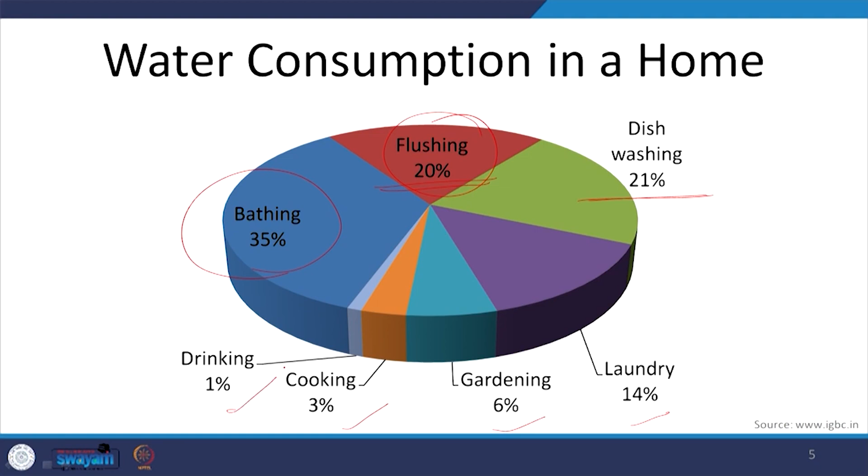WCs which we are using now, we are gradually shifting from the Indian style squat pans more and more to the European toilets. The flushing requirement in India in residential buildings, homes, is also increasing, it is changing. It is then followed by dishwashing, which is still quite low in Indian homes, and then all others like laundry, gardening, cooking and drinking. So this is the overall distribution of water consumption within a house.

Now, if we have to improve the efficiency of how water is used, we are talking about the 3 R's. First of all, we should reduce the amount of water consumption in the residence. Now, how do we do it? We will talk about it in subsequent slides, but the first measure is to reduce the amount of water consumed.

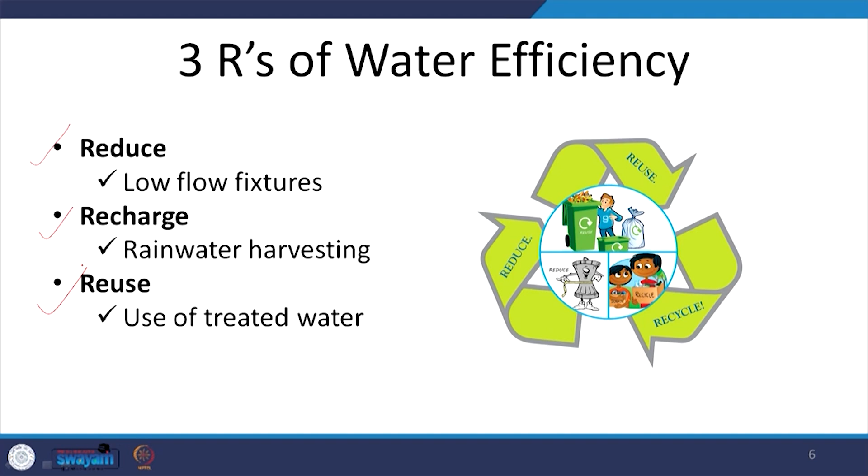The next is recharge. So we reduce and then we recharge, capturing the rainwater, as we have also seen in the previous week's discussions on storm water management. So we actually capture the storm water, the rainwater, in the form of rainwater harvesting. We first reduce and then recharge parallelly, and the third one is reuse. Reuse is after treating - so we first treat the wastewater and then reuse it for different purposes. How these 3 R's will be achieved when we are talking about sustainable buildings or sustainable built environment?

The approach is to first reduce the amount of water consumed with the help of low flow fixtures, or also through the use of enhanced irrigation systems, because gardening or landscape is a major consumer of water in any building or built environment.

Once we have reduced the amount of water consumed in a building, we treat the wastewater through on-site STP, sewage treatment plants. So whatever water has been wasted after usage, we capture it, treat it, and reuse it.

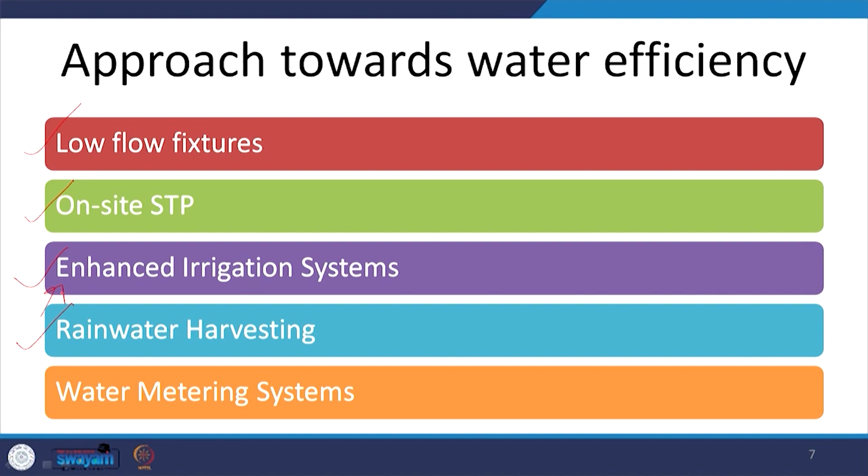In addition to STP, we also capture rainwater through rainwater harvesting to make up for the use in the building, so that we do not have to depend upon underground water systems, or reduce the load on municipal systems, because municipal water systems are actually drawing water largely from surface aquifers and underground water.

We have to reduce our dependency on all of these water resources and become water independent. So we can capture the rainwater and use it throughout the year - that should be the ideal scenario. If not, then at least getting close to it is what the intent should be.

In addition to these, there are water metering systems. It is established that anything that is measured and monitored is what we value, and vice versa, whatever we value we measure and monitor. Once we are able to measure and monitor what is happening, what is going where, we are able to improve upon the system.

If we know where water is getting lost or wasted, we will treat it. But if we do not even know where the water is getting wasted, where it is going, we cannot improve upon the efficiency of the system. So we need to have in place the water metering systems.

Let us go over each one of these in detail through the course of this week's discussions on water. First, we will talk about the goals of water efficiency. The first and foremost is to reduce the quantity of water consumed in a building. That in turn leads to reduction of municipal water supply and treatment burden.

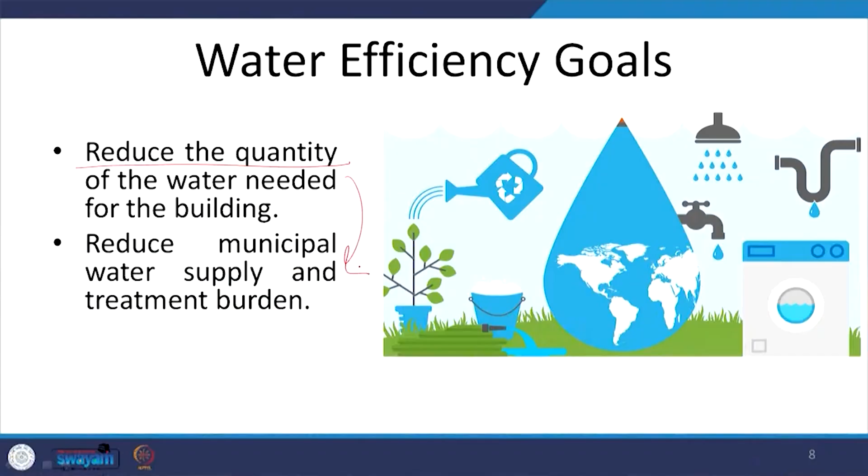So the first is to reduce the quantity of water needed. How do we do that? What are the strategies? Let us look at some of the strategies which are highly efficient, extremely efficient. One of these is dry composting toilets.

The basic concept of a dry composting toilet is to use the soil, use the excreta and let it dry, so that it totally disintegrates and composts to give us good manure, which can further be used in the fields for gardening, as manure. In this system, there is no water that actually goes into the sewer, so there is no wastewater generated, because no water is used for flushing.

Instead of flushing with water, what actually happens, as you can see in this image, is there is a seat, a WC, and instead of using water, there is sawdust mixed with lime. Both of these are sprinkled on after use. So instead of water, only dry matter is used.

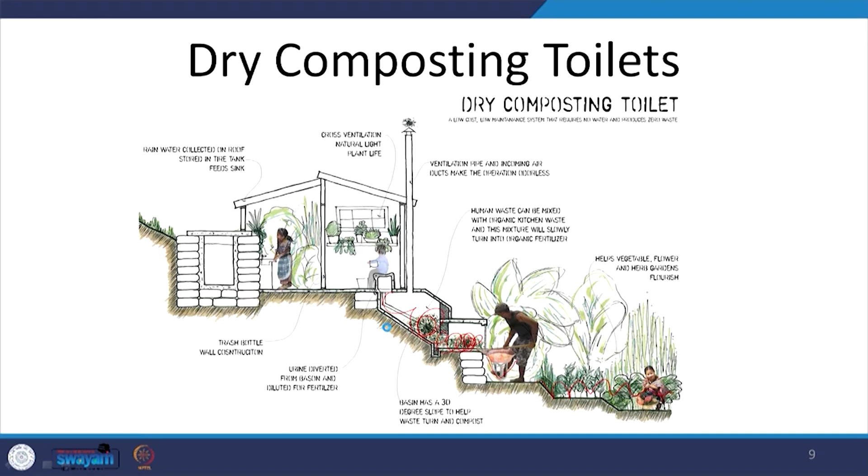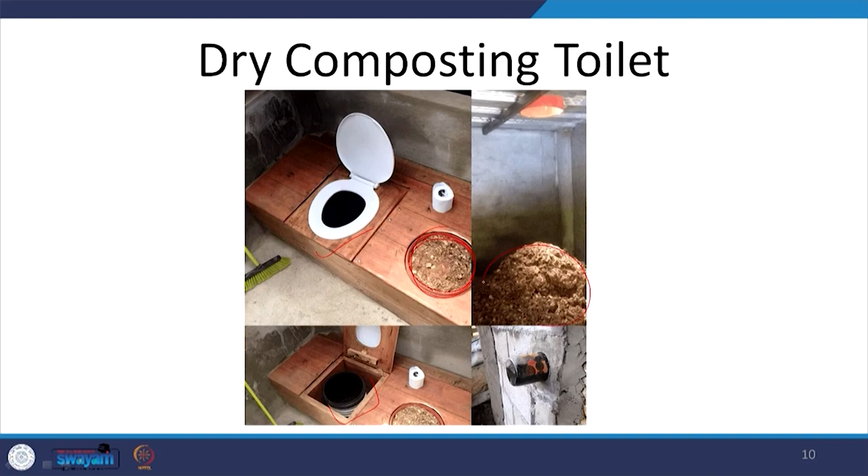This dry matter helps absorb any water content in the soil, which is collected in the tub, or in some cases in a chamber. The water is totally absorbed and the dry waste is left to dry and disintegrate on its own, leading to formation of a very rich compost, which can actually be used as manure in the gardens. This is the basic idea of a dry composting toilet.

Unfortunately, because of the psychological barrier, we are not able to use dry composting toilets very commonly, and it is not a very popular concept, but sooner or later we will have to come back to this concept of dry composting toilets. If we see how under the Swachh Bharat mission, the toilets have been promoted, which was an extremely good step.

Which was a good initiative by the government of India, where toilets were provided to each household which did not have one, so that open defecation can be controlled, and it has been controlled, almost brought down to 0%. But in turn, because now every household has a toilet and we are used to using water for flushing.

The water usage in all the villages everywhere has tremendously gone high. And where does this water come from? It is limited. This water is coming through pumping of underground water, and that is causing a severe drop in the underground water tables across the country, even in the rural areas.

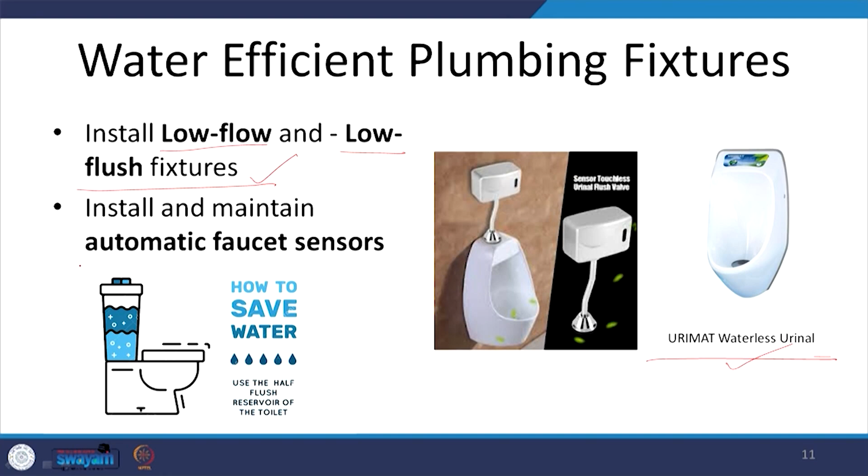So, the first step, ideal step, would be to use fixtures which are zero water consuming. If not, then we will install low flow and low flush fixtures. We will also encourage the use of automatic faucet sensors, where the flushing automatically happens when it is used, so you do not flush it unnecessarily, it is automated with the help of some sensors.

So, first of all we select an efficient plumbing fixture. In addition to that, we also install the low flow fixtures. So, with this low flow, we mean that for the same pressure we reduce the amount of water which is being consumed by installing the flow restrictors or the flow aerators.

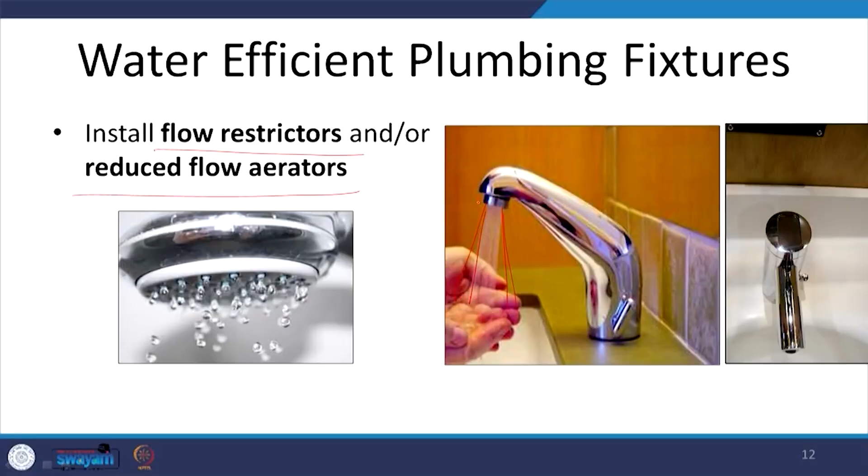So, in this flow, instead of just water, there is a lot of air which is mixed with the help of this aerator which is installed here, which is what we were seeing in the newspaper clipping, where the city of Pune was promoting the use of fixing aerators in the taps. So, with the help of this, the pressure is maintained, but the amount of water which is consumed is reduced. This is the low flow fixture.

So, in the market today, there are a variety of these low flow fixtures which are available. We also have provisions for adding aerators to the existing fixtures which are there, so that provision is also there, and market is reasonably ready, competently ready, and there are a variety of these products which are available.

Now, if we look at the green building rating systems, these rating systems emphasize upon reducing the consumption of water from the baseline. Now, we need to have a baseline from which the reduction in consumption can be calculated. So, this baseline criteria for India is given by the National Plumbing Code, and this is what is followed by the IGBC and other green building rating systems as well.

So, if we look at this table, the baseline criteria is in terms of the fixture type and the maximum flow rate or capacity for this fixture. For example, for water closet, for a full flush, it says 6 liters per flush is the conventional water consumption, and in a day per person 1 flush is assumed.

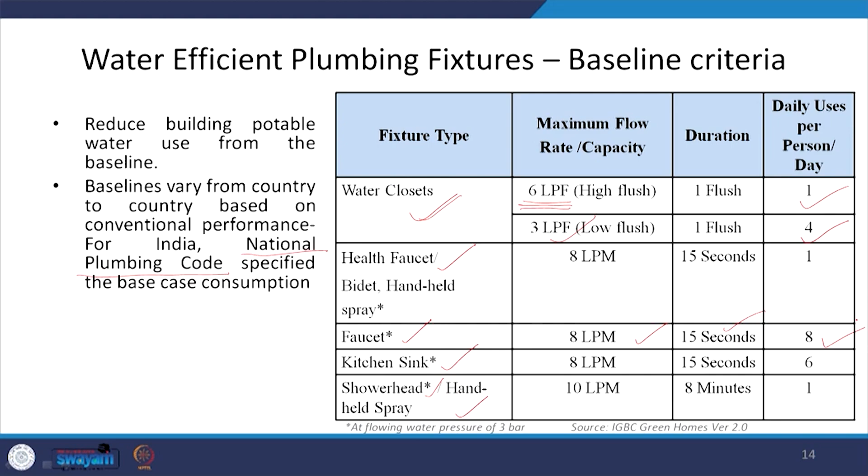With the help of this baseline, the conventional water consumption, baseline water consumption, for any building can be calculated. This is as per LEED—I am taking the example of LEED here. Different rating systems have different baselines, which they have largely taken from existing codes.

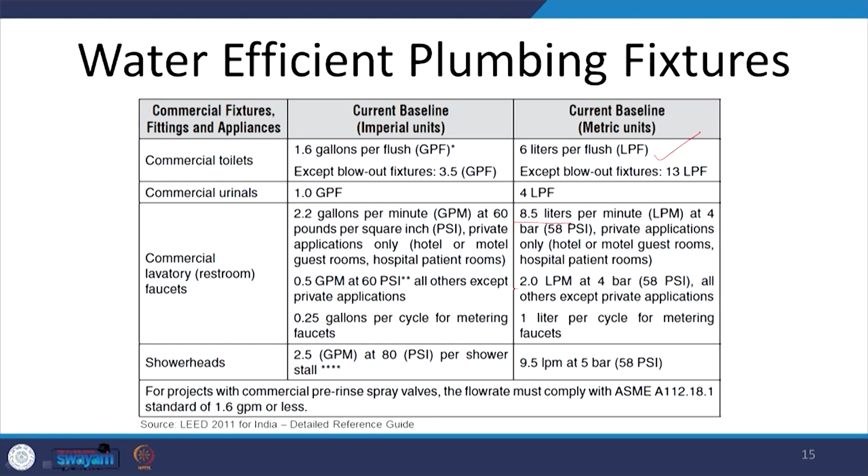For example, this one comes directly from the National Plumbing Code. So these baselines are coming from some or the other code. They may vary, or they may also remain the same, but this baseline calculation metric is provided for any green building rating system.

This particular table shows some of the plumbing fixtures and their flow rates. This includes the conventional fixtures and the more advanced, high-tech ones.

For example, a conventional water closet consumes 6 liters per flush, which is what the baseline says for the conventional WC. While if we look at the high efficiency toilet, this flow rate has been reduced to 4.8. So there are fixtures available in the market which offer this, and not just this—around 3.8 liters per flush fixtures are also available.

We can also see for others, for example, the conventional urinal. It consumes around 3.8 liters per flush, while a non-water urinal, a waterless urinal, consumes only 0 liters because it is waterless. So we can save directly.

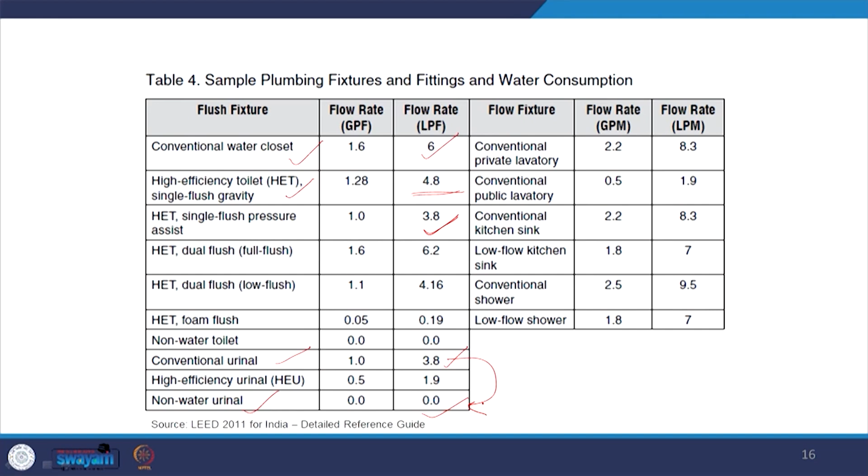With the help of this right selection of low flow fixtures, we can reduce the amount of water that is going to be consumed, and as per the green building rating systems, we have to document this reduction in consumption. For this, proper calculations have to be done and we have to show how much water has been saved.

Now, to calculate, the first thing we have to do is know the baseline case—we have to establish the baseline case. For the baseline case, the requirement of water for conventional fixtures is given as per the codes or the rating system, whatever we are following.

In addition to that, we also require the occupancy. This occupancy is calculated in terms of FTE, which is the full time equivalent. What is full time equivalent? It is the number of employees or occupants who are present for an 8-hour working day, for 5 working days per week, in case of an office building.

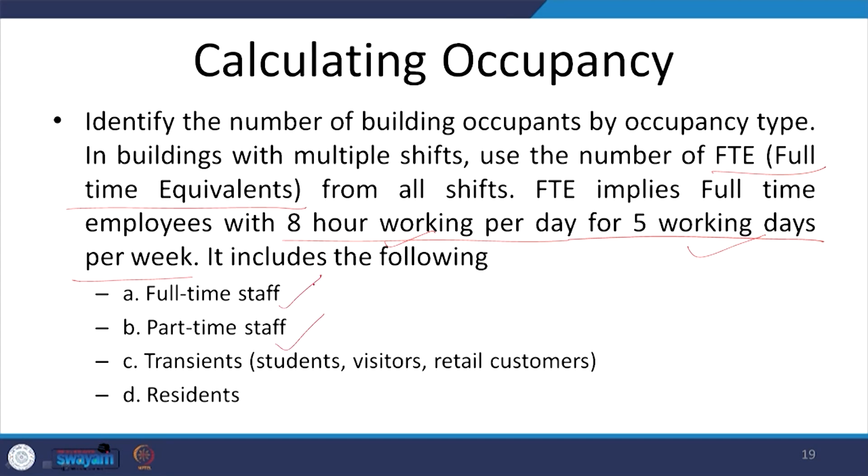In case of a commercial building, that is how we calculate FTE. The FTE calculation for residential buildings is slightly different, but it works on the same principle—how many people are going to be staying in a particular given space for a given duration of time. So for commercial buildings, we calculate it for an 8-hour working day, 5 working days per week. It includes all types of occupants—they may be full time staff, part time staff, transient population, or residents who are totally going to be there.

Looking at one example of this FTE calculation: there is an office building, a daytime use building, which has 120 permanent employees, 30 part time employees who come for only 3 hours per day every day, and 30 part time employees who come for 2 days a week. We have to calculate the total FTE, and this will determine how much water is required as a baseline calculation and how much reduction subsequently happens.

So, 120 permanent employees, who are full time employees—the direct FTE will be 120, because they are there for 8 hours per day and for all 5 days of the week.

Next is the 30 part time employees who come only for 3 hours daily. For this, we calculate 30, which is the number of part time employees, multiplied by 3 hours per day and divided by 8, because we calculate FTE for an 8-hour working day, which gives us 11.25.

This is the FTE equivalent for the part time employees. Next, we have 30 part time employees working 2 days per week. So this is 30 multiplied by 2, divided by 5 working days in a week, which gives us a figure of 12. So 30 part time employees working 2 days a week are equivalent to 12 full time employees.

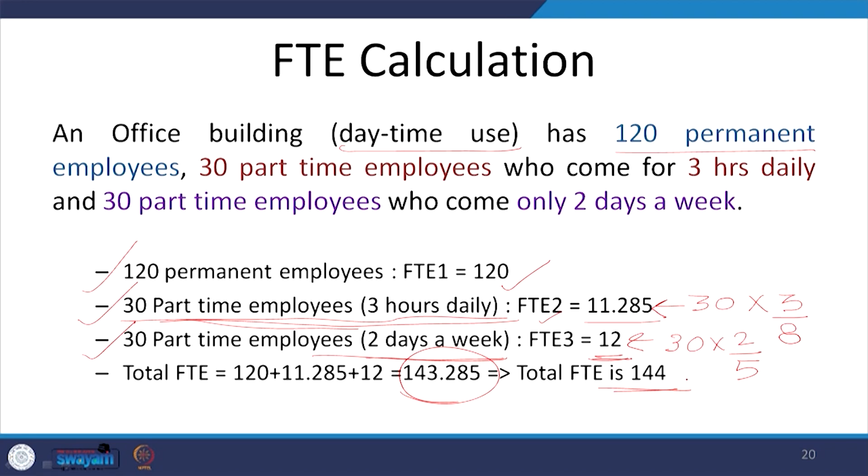So the first step towards this would be calculating FTE, full time equivalents, for any given building. Now, we already have the baselines available with us from the codes, and we have the FTEs. Once we have that, we will calculate the base case water consumption, as shown on this slide.

Here we will write the different types of fixtures which are installed in the building, and how many of such fixtures or uses will be required in the building, coming from the baseline. The flow rate is also given in the baseline. For example, for a WC full flush it is 6 liters per flush, 3 and 6 again, for males and females each.

So we are looking at the number of uses, which is also coming from the baseline. We are looking at the duration of the flush in seconds, again coming from the baseline. So this entire thing is actually coming from the baseline.

This number of males and females is coming from the FTE data. So we should know that in the total FTE, how many are males and how many are females. If it is not known, then a percentage distribution assumption will be taken and the FTE's distribution into male and female will be calculated.

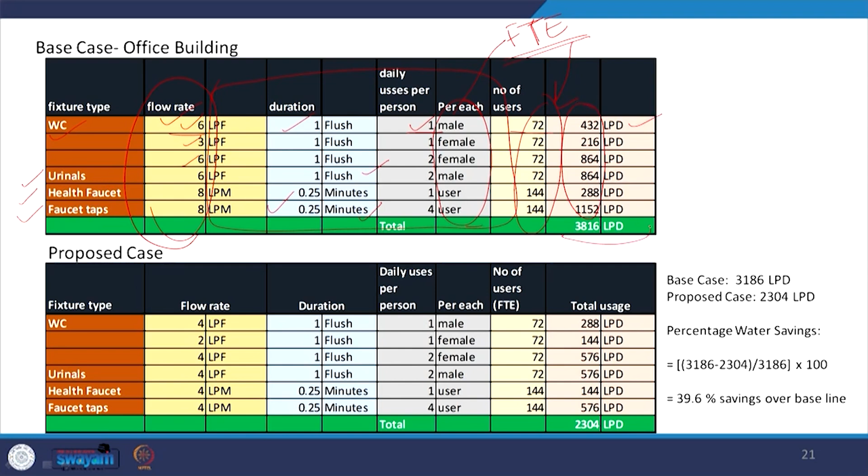In the first case, even the flow rates are coming from the base case tables. This number of users is actually coming from the FTE calculations. Multiplying the number of users with the flow rates, durations, and number of flushes, we will calculate the liters per day usage of water, and how much water will be consumed on a daily basis.

Now, for proposing the new case, for a sustainable building where water consumption has to be reduced, we will take the same fixture type, but an improved variety where only this flow rate will change. So instead of 6, which was prescribed as per the base case for a conventional fixture, we now choose an efficient fixture which has a flow rate of say 4 liters per flush as compared to 6, 2 as compared to 3, again 4 as compared to 6, and 4 as compared to 8.

So here the documentation will be required, where the specification and the manufacturer's note will have to be saved while the fixtures are selected. Once these flow rates have been taken, the rest of the table remains the same, exactly as in the base case calculation table. This has to be retained as the same.

With the help of this change in flow rate, the new total usage will be calculated. Here we can see that while the base case water consumption was 3186 liters per day, the proposed case consumption was reduced to 2304 liters per day, which implies approximately a 40% savings over the baseline, achieved only by changing the type of fixture installed in the building. So selecting the right kind of fixture becomes a very important strategy, and it has to be done right in the beginning. Low flow fixtures and low flush fixtures have to be chosen carefully.

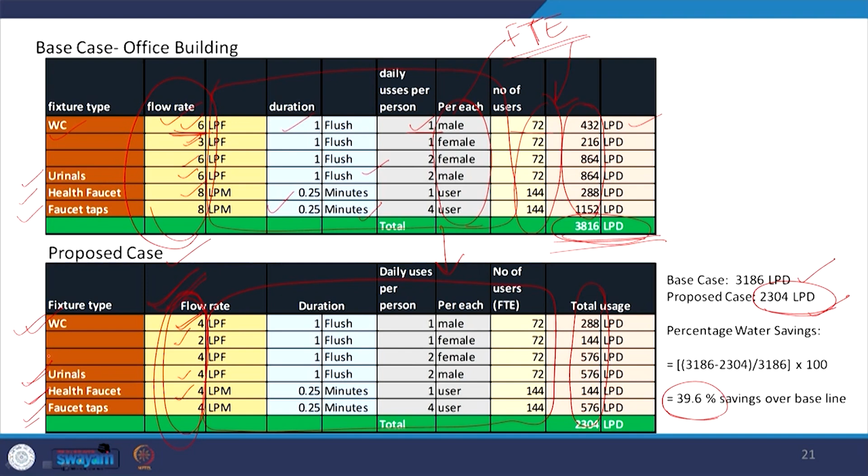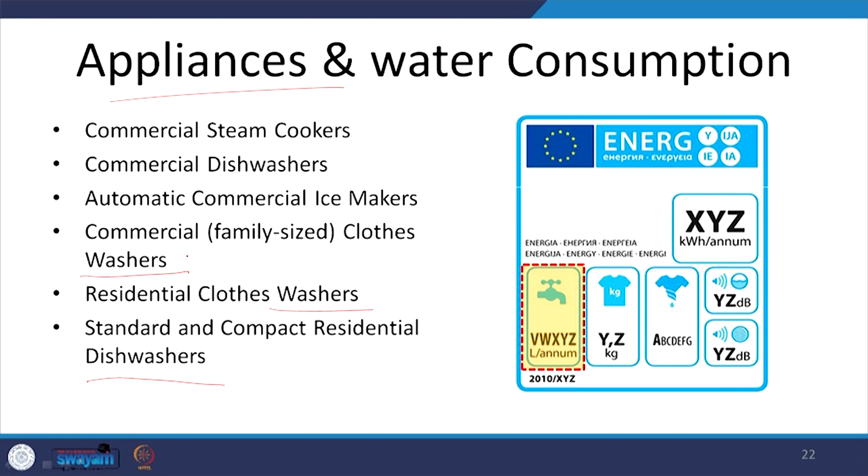Besides that, water also gets consumed by the appliances within the household. So here we are talking about the household, for example washers, washing machines, dishwashers. If there are commercial washers, for example it may be an apartment building where a laundry facility has been provided with community washers, so those are commercial grade cloth washers, and other appliances as well.

While these appliances are selected, the manufacturer details have to be checked for their water and energy consumption. Technologically improved washing machines and dishwashers are available which consume lesser amounts of water, and they have to be selected over conventional machines which consume more water.

In addition to selecting these appliances, water metering has to be planned right at the beginning, because that happens at the time of planning the plumbing layout. The water has to be metered for different types of consumption: potable water consumption for human use, and captured rainwater - how much of the rainwater has been captured. This will help us in making a water balance chart.

There will be estimations on the basis of which the sizes of the tanks and other calculations will be done. But on the basis of water metering, the actual numbers will be substituted in the water balance diagram, which we will subsequently see in the coming lectures.

The next is landscape water consumption - how much water is actually getting consumed in gardening for landscape. Hot water consumption through solar: if solar water heaters are provided, which should ideally be provided, how much water is coming from those solar water heaters and being consumed. Then treated water consumption - how much water is treated and consumed. Air conditioning water makeup and other innovative water consumption, for example for swimming pools, for common car wash facilities.

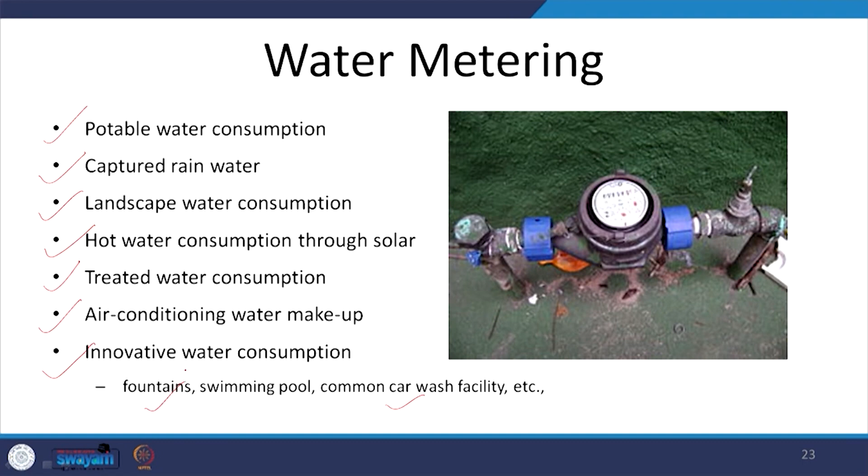Suppose there is a common car wash facility provided, or there are fountains - all these have to be metered separately, and all of this will actually go back into the water balance chart, where different inputs and outputs are given. In addition, there will also be a head where we measure the water going towards the treatment plant - how much water is going towards the treatment plant and how much is received from the treatment plant - and then going into these different heads will be metered sufficiently.

There are different types of water meters - flow meters which are available for individual use. This is for educating and sensitizing each individual for limiting water use, which is a very good strategy, but it comes at a cost. Besides that, there are water meters for each dwelling unit, and then there are municipal water supply meters, which you might have seen installed in your homes wherever municipal water supply is coming.

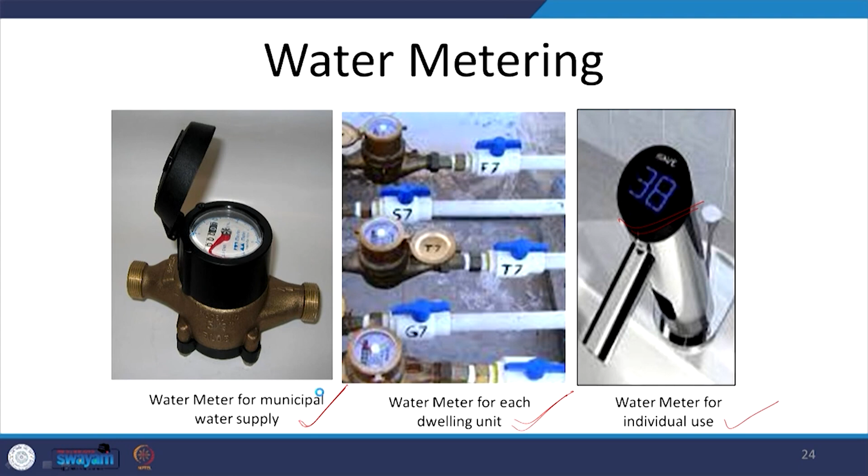If we summarize today's lecture, we have largely discussed water use reduction strategies. The first is high efficiency faucet aerators. We also talked about high efficiency shower heads - not just shower heads, but also the low flow fixtures. Then monitoring and evaluation of savings, which is what we discussed in water metering. Replacement of leaking fixtures - now here we talk about installation of new low flow fixtures, low flush fixtures, waterless urinals, dry composting toilets, but very essential is replacement of leaking fixtures and timely management of that.

This can also be noticed through the monitoring and evaluation process, metering. Wherever the water consumption changes while everything else remains the same, this will indicate that there is probably a leakage in the system. That is why water consumption is increasing, or there might be some other cause which needs to be identified and rectified. Then toilet adjustment and flapper replacement - instead of using a high flow fixture, changing it to a low flow fixture, and even high tech, further reduced flow.